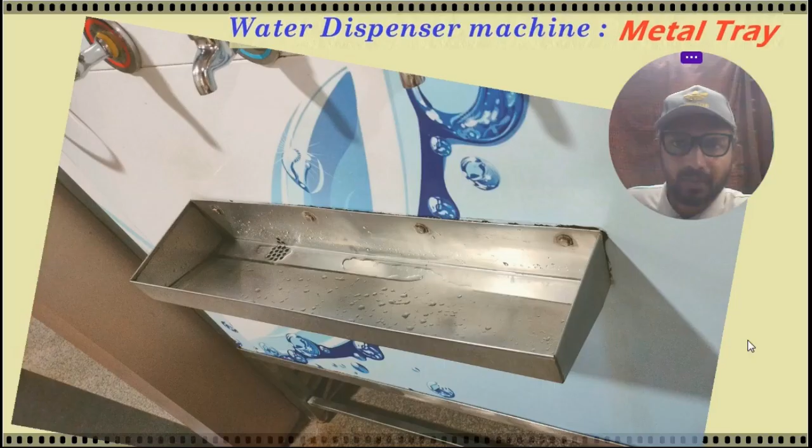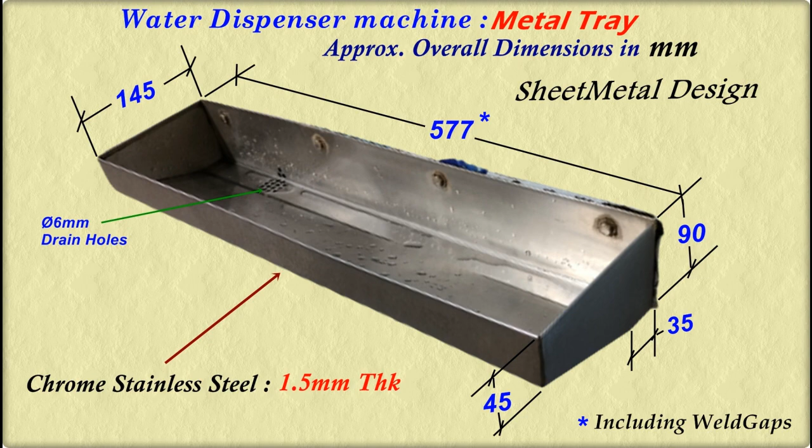Here you could see a steel tray which is a part of a water dispenser machine. This is of chrome stainless steel, 1.5 mm thick, 3 formed metal pieces welded together. Here you could see approx overall dimensions in mm. 3D visualization of the final design.

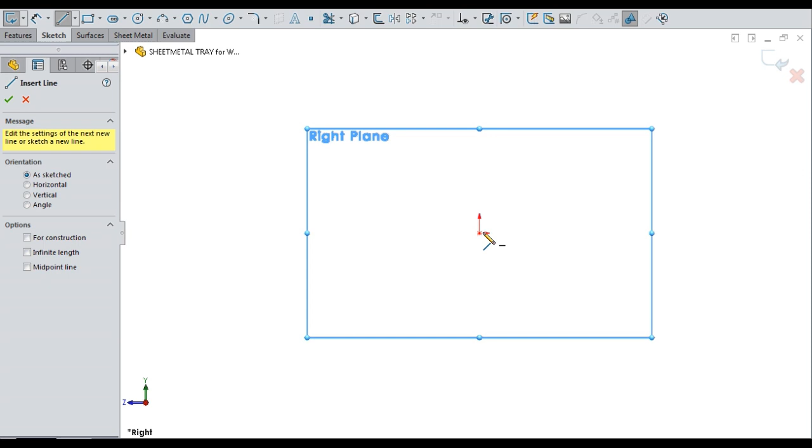Let's draw the main sketch with dimensions for the tray. All are lines. Let's convert this sketch into a formed metal piece of thickness 1.5 mm to a length of 573 mm.

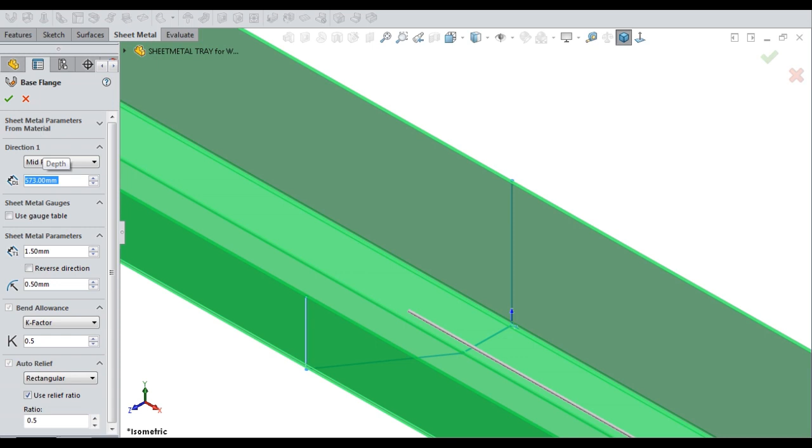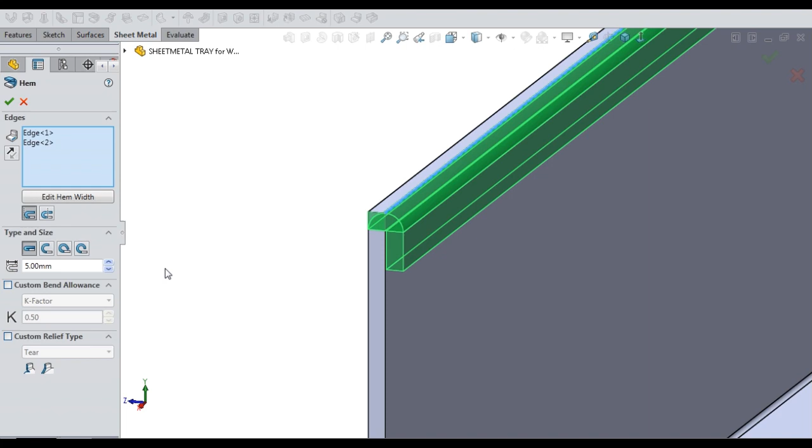Let's curl the edges of the formed sheet metal piece towards inside on both front and back. Let's sketch for piece 2, which is exactly to match the side profile of the main piece. Let's convert the sketch into a metal piece.

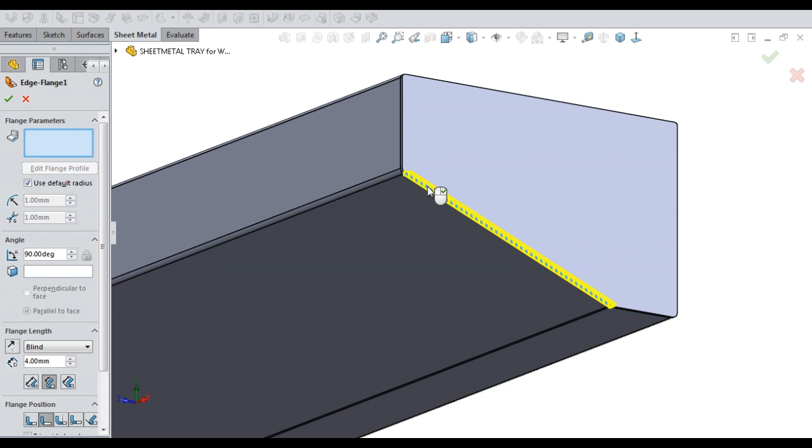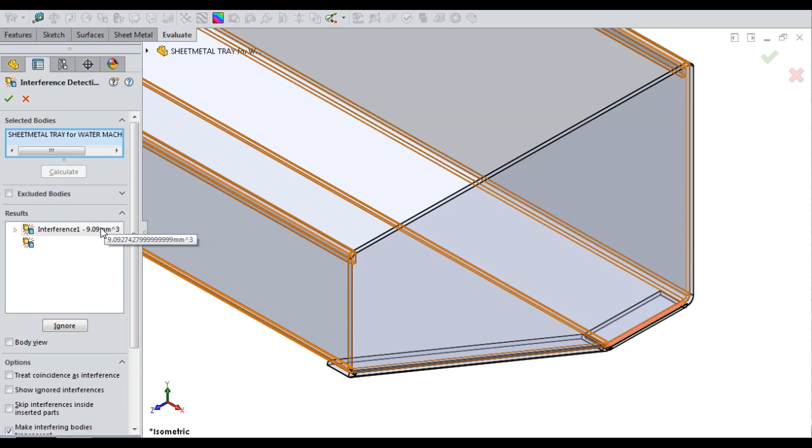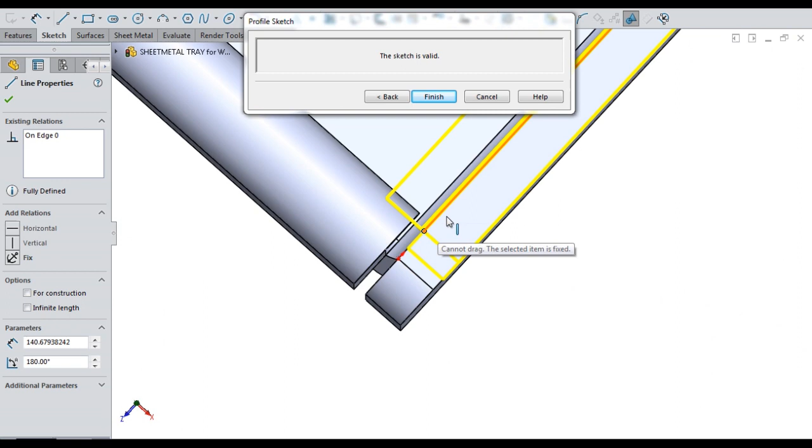Let's move the side piece about half mm to avoid interference. Let's curl the edges of the side piece by keeping small clearance. Let's duplicate the side metal piece to the other side.

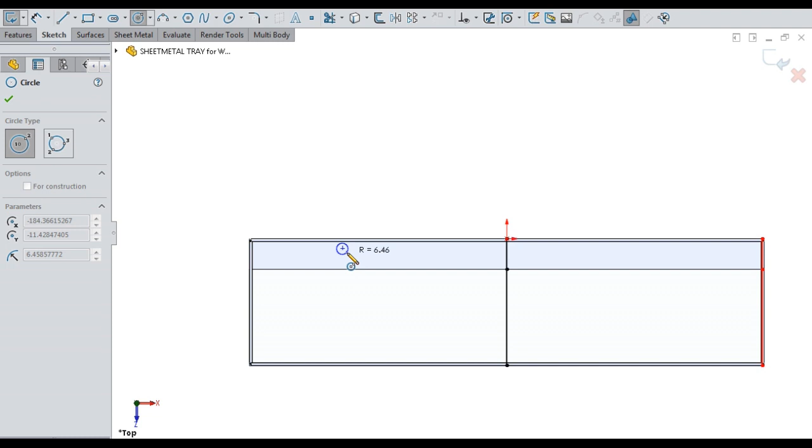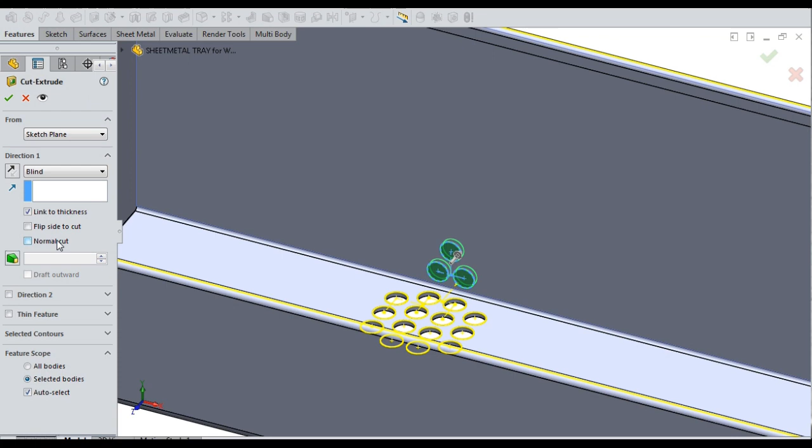Let's sketch a group of circles of dia 6 mm for drainage holes. Let's make the drainage holes. Replicating the holes on the adjacent face for drain. Made 4 holes of dia 6.5 mm for mounting of the full tray.

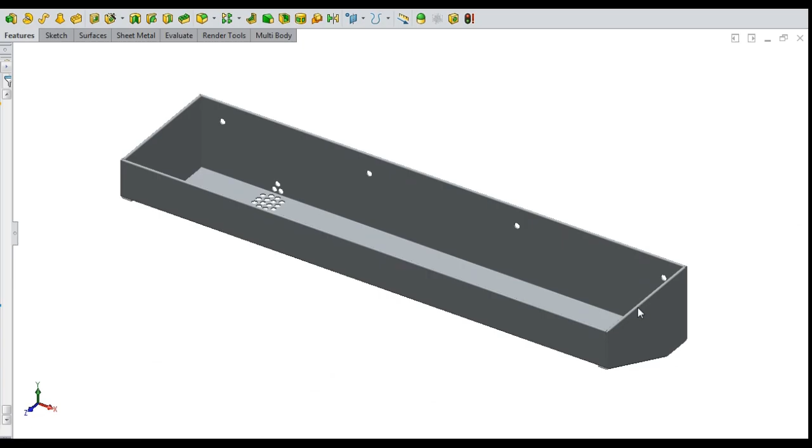Applied the material chrome stainless steel for the full tray. Let's weld 3 formed steel pieces together. Final weight of the tray 2.3 kg.